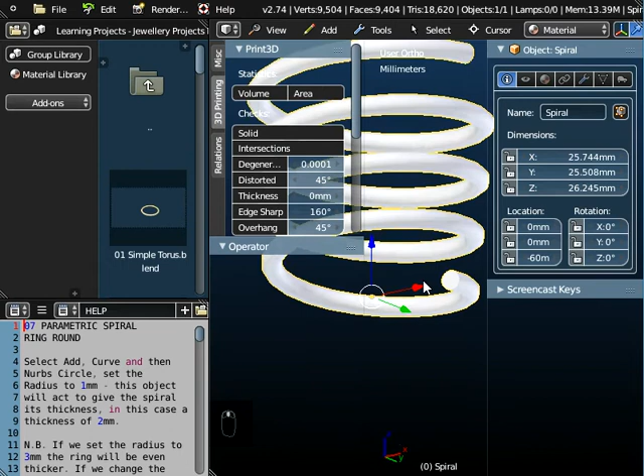If I zoom in on this spiral, what you should notice is that it's got a circular cross section, and the first thing that we need to do before we can create the spiral is to create this circular cross section. We don't have to have our spiral ring with a circular cross section. We can change it to a square cross section, or triangular if we like, but we're going to stick to a circular cross section today.

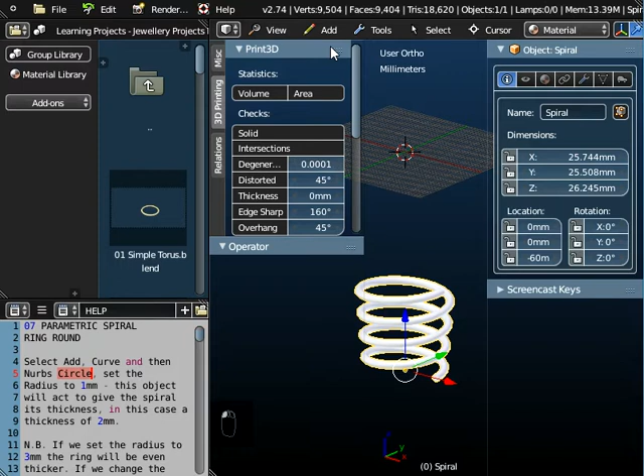So the first thing we're going to do is to add a curve and then add a NURBS circle. So we're going to go to add curve and NURBS circle.

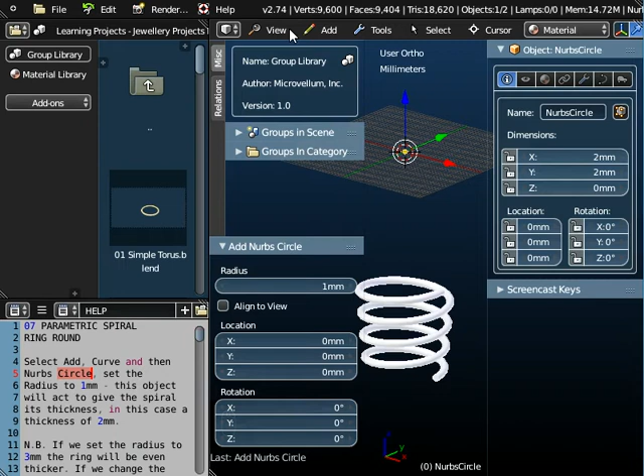Now this properties window pops up here, and it tells us that the radius of the circle is 1 millimeter, and therefore the x and y dimensions of the circle are 2 millimeters. In other words, the diameter of the circle, the distance from here to here, is 2 millimeters. And what that gives me is a thickness of my ring of also 2 millimeters, because we're going to use this NURBS circle and wrap it around this spiral.

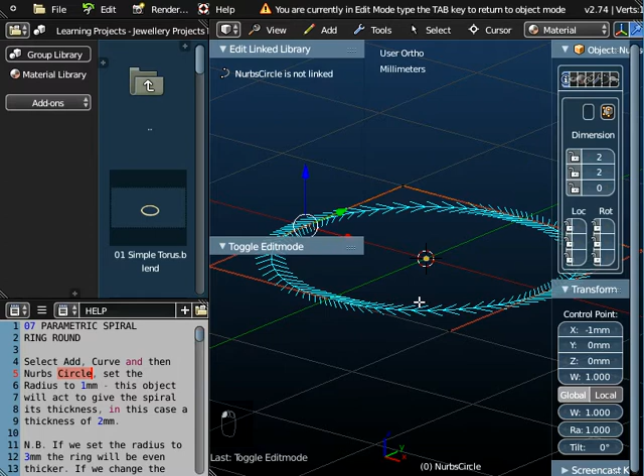If I go to view and zoom to selected again, at the moment this does look like it is just a simple circle, but if we press the tab key we'll see it's a bit more complicated than that. Because it's a NURBS circle, it has got a number of control points around it, like Bezier curves and Bezier circles. NURBS circles have got control points around them, so we could, if we want, modify this to a different shape.

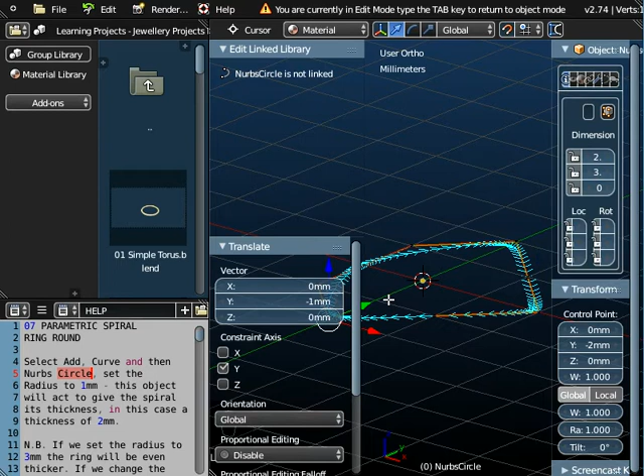Before I do that, I'm going to switch on snap and select increments so that when I do modify it, I'll modify it in particular ways that I can easily put back. So as you can see, I'm modifying what was a circle now into a completely different shape. So there we've almost got a square look. If we applied this shape around our spiral, we'd end up with a square cross section.

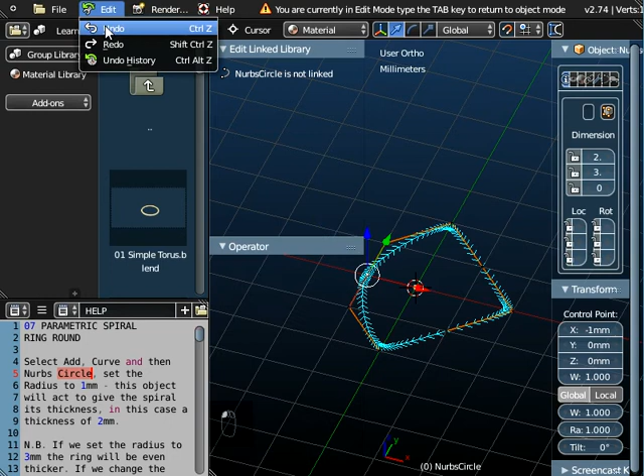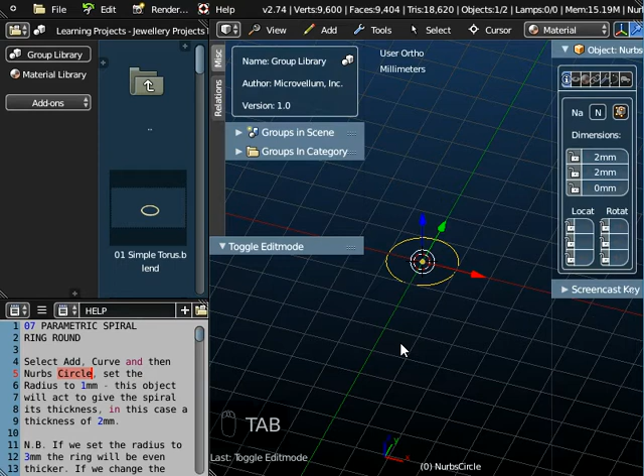I'm just going to undo all that because I want to leave it as a circle. Okay, so there's the circle back where it was, and I'm just going to switch the snap off as well. I only switched that on so that it made life easy in terms of adjusting that shape. So if we press the tab key to come out of edit mode now, it looks like a circle there, but it's a little bit more complicated than that. It is a NURBS circle which we can reshape. Okay, so that's the first object that we need.

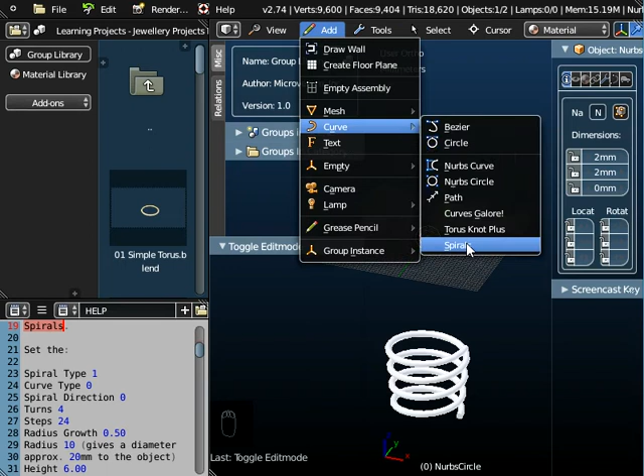Now the second thing is we need a spiral. So if we go to add curve and spirals, again it's important that this toolbox is open. If the toolbox isn't open, you can always press T on the keyboard. T will open and close the toolbox, because we've got some parameters in here that we can change. Now let's just zoom to selected again.

Now we can't really see the spiral at the moment because it's overlapping with the NURBS circle. But you can see it now. Look, if I change the spiral type to 3 or to 4, you can see that the spiral changes shape. So spiral type 1 actually does look like it's a circle, so we don't need to change spiral type, I'm going to leave that as is. And we're not going to change curve type or spiral direction either.

But we are going to change the number of turns. We're going to increase the number of turns to 4. Now you can't see anything at the moment, but we will do as we change some later values.

Now step 24. 24 probably means if we count around it, there will be 24 segments around the object. But we don't want to change that either, not in this lesson.

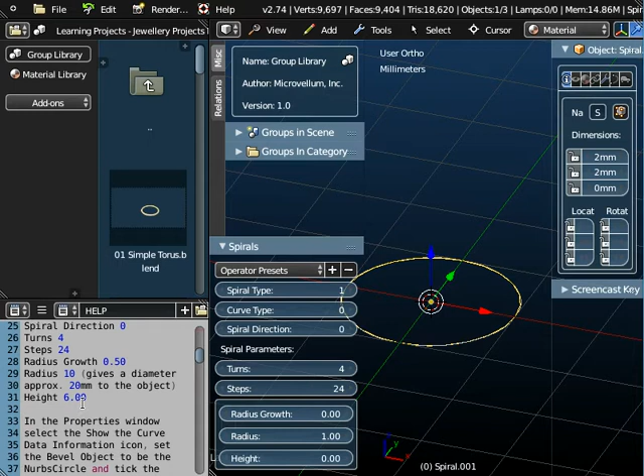The next thing we want to change, however, is the radius growth. So if we click on this one, you'll see what happens. Now we can see the 4 turns, because the radius growth does what it says.

We start off with a radius of 1. Radius growth means after we go round 1 turn, instead of a radius of 1, we're at a radius of 1.09 at this point here.

When we go round the second turn, we're at a radius of 1 plus 0.09 plus 0.09. So that's what radius growth is doing.

And we want to set this at 0.5, so I can just type that in. That's just going to, we'll see when we create the solid ring what effect that actually has. So that's the radius growth.

Now the next thing we want to change is the actual radius itself. At the moment, this radius here is 1 millimeter.

So we want to increase that, and as you can see, as we increase it, the actual spiral is moving away from the NURBS circle. In the center here, what's left is the NURBS circle.

This is now the spiral that's moving away from it, and we want to set the radius to be 10. So I'm going to actually type it in, 10, and then just zoom back.

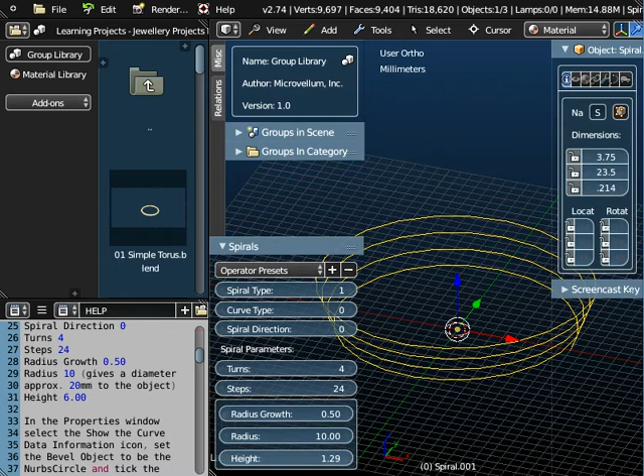And then the final thing we want to change is the height. Well, as we do that, you can see what's happening. Each successive spiral is moving upwards. So this is, the height is giving us the width, if you like, of the ring.

We want to set it at 6, so I'm just going to type in 6 now. Okay, so there's our spiral with 4 turns and a radius of 10.

And we've also got this radius growth. Now what the radius growth means is the radius at the bottom of the ring is smaller than the radius at the top. So the ring actually tapers outwards.

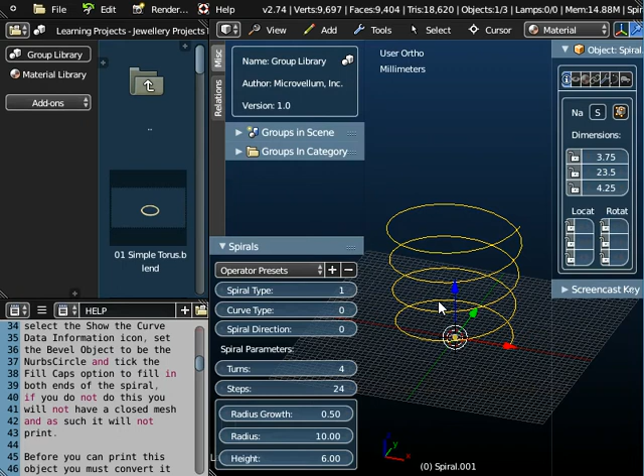It will be a smaller radius, a smaller diameter at this end than this end. So the ring will taper outwards.

And you can see that in the finished object. It's smaller at this end than this end.

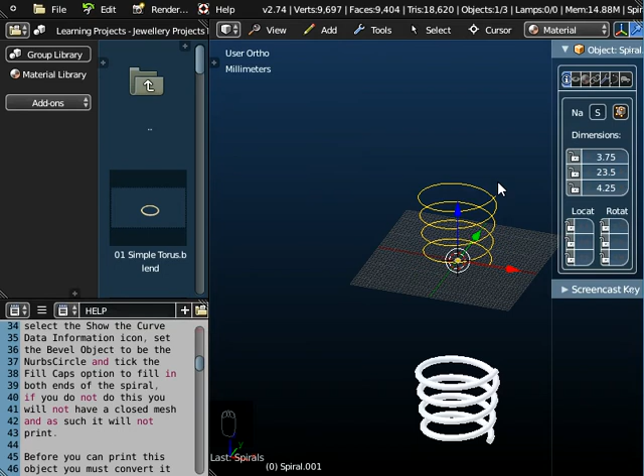So we've now set all the values in the properties panel here for the spiral. We don't want to make any more changes there. So what we need to do now is give this spiral some thickness, and we do that in the properties panel.

Our spiral is a curve, and in the properties panel there is a curve icon, and when we click on that icon, it says show the curve data information.

We can see that there are a couple of things in here, and a couple of properties that we can change. Now there are 2 things we need to change here.

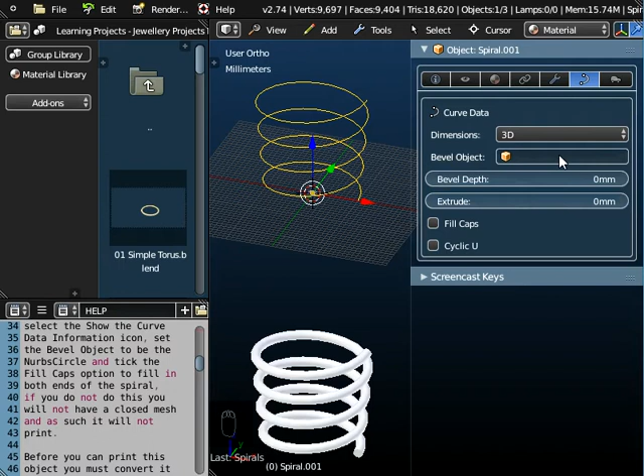First of all, we want to change the bevel object. And when we do that, when we click on there, you can see the name NURBS circle. That's the first item we put onto our workspace, the NURBS circle.

And when we select NURBS circle, what the system does is it wraps the NURBS circle all the way around the length of the spiral.

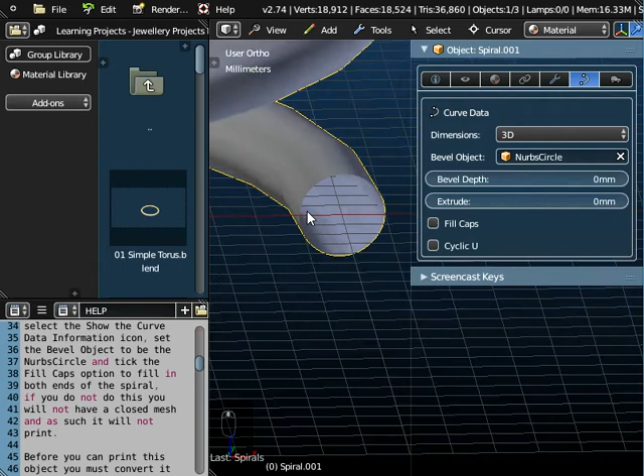So it gives the spiral a thickness, a diameter of 2 millimeters. It just wraps the NURBS circle around. Now if we zoom in, you'll see the one thing it doesn't do is it doesn't fill in the end, and the same is true at the other end of the spiral.

But all we need to do is tick this box here, fill caps, and that fills in the end of the spiral. So we do need to tick fill caps.

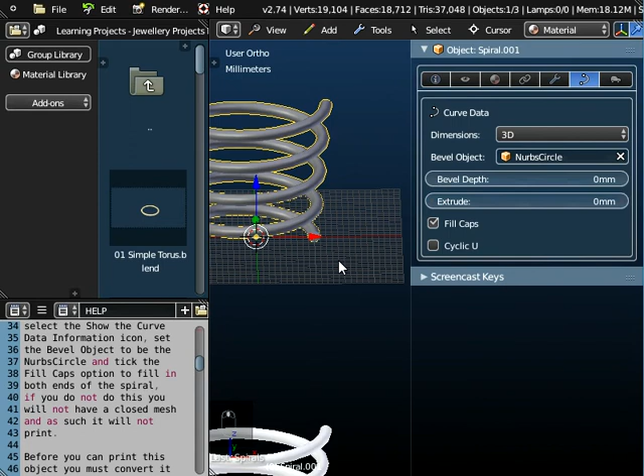Now this won't make a perfect job of it in terms of 3D printing, but when we go to NetFabb Basic, any little errors there are at the end there, NetFabb will sort it out for us. So, bevel object NURBS circle, fill caps.

To apply this in Fluid Designer, we always need to go to Tools, Object Tools, and convert it to a mesh. When we do that, it will disappear. There's no curve icon here now. This is now a mesh, it's not a curve anymore, so we can't change those properties again, so you do need to be sure about what you're doing before you apply it.

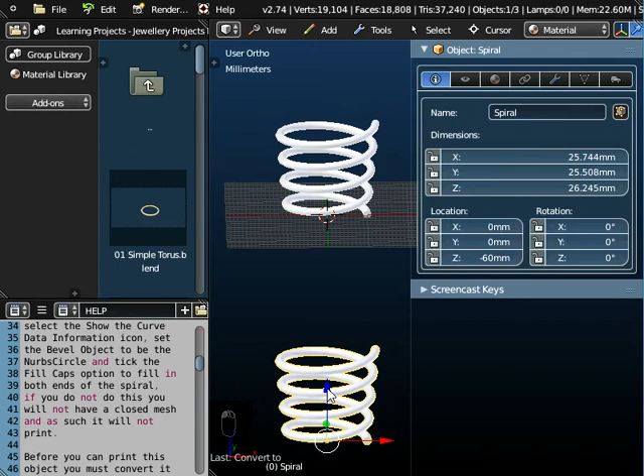So if we now delete the original object, X to delete, here's the one that we've created today. Now the only thing is, let me just go to view from top, and if I just zoom in, you can see it tapering away. That's not because we're in perspective mode, it's because of those radius growth settings, so it does taper.

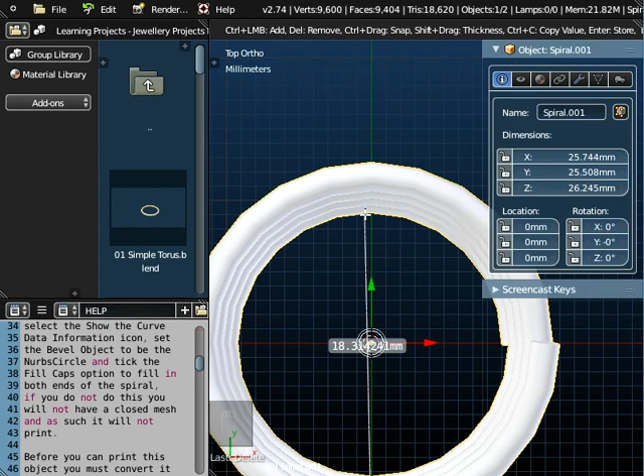And if we use the interactive ruler and we measure the internal diameter of this, it's 18 millimeters, so it's a little bit less than the 20 millimeters that we set it up to.

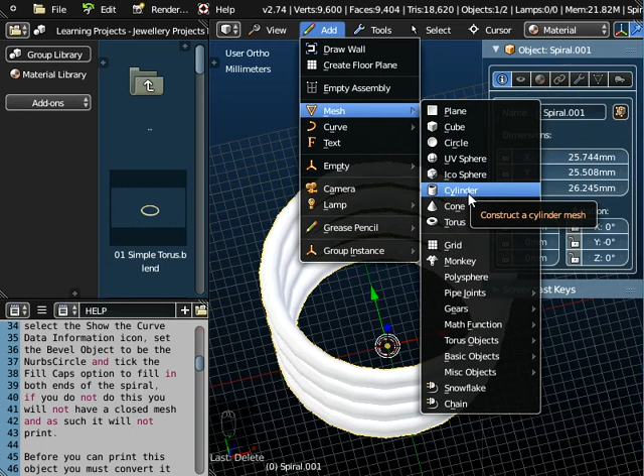If we wanted to adjust the size of this, if we wanted to resize it, we could always, as you've probably seen in earlier lessons, add a cylinder, size the cylinder to the diameter that we need for our ring, and then S to scale the ring.

I'm not going to do that in this instance. Oops, I have actually accidentally added that. I didn't intend to. I'll just delete that. And I'll also delete the NURBS circle. It won't print anyway, but let's just get rid of it. So the only thing we've got is our spiral.

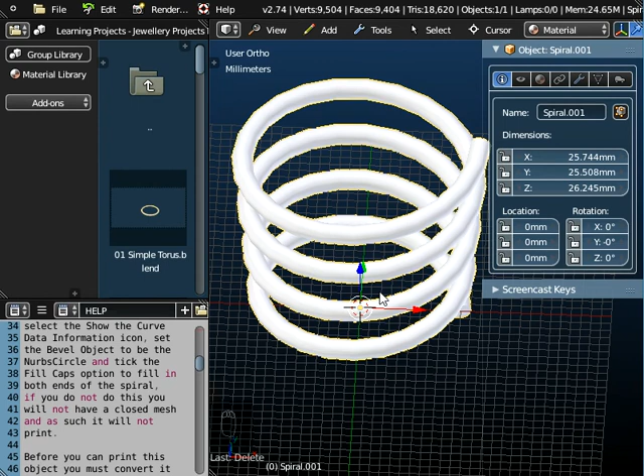So I'm not going to resize it in this particular video. I've shown you a few times before how to do that. What I'm going to say now is that what we need to do is to save it.

So we go to File and Save As. Go up through the menu system and go to My Projects, Jewelry Projects, Rings. So we save lesson 07, save it as a parametric spiral ring with a rounded cross section, and you save it as a Blender file.

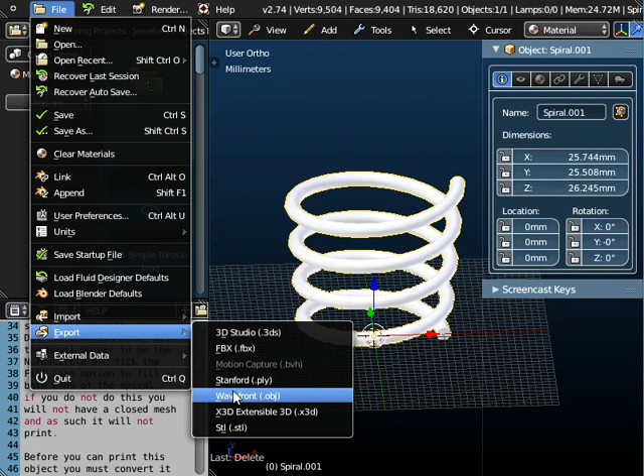Now it is very important with this one that we need to go to NetFabb Basic and fix it. So if we export it as a wavefront object and export it to the desktop with the file extension OBJ, and then if you run NetFabb Basic and go to Project and Open, go to the desktop, open 07 parametric spiral ring with a rounded cross section, you'll see you do get a warning red triangle. That's exactly what I was expecting.

Now you can probably see a little bit more clearly here that there are 1, 2, 3, 4, 5, 6 - there are 24 segments around here. So we've got a relatively chunky ring. If we wanted a much smoother ring, we'd have to increase the number of segments in the properties window back in Fluid Designer.

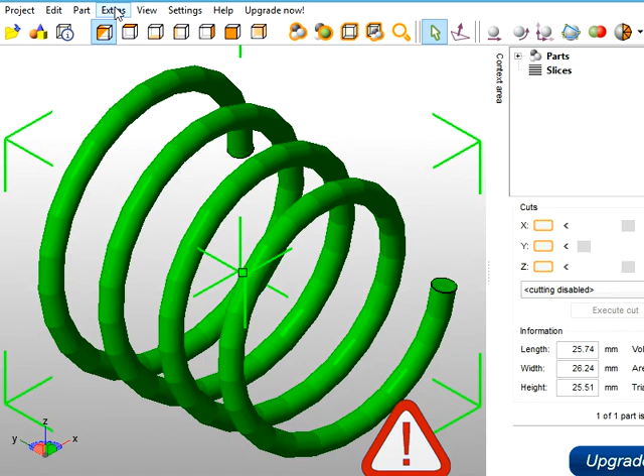But here what we need to do is go to Extras and repair the part. And you can see that it's highlighted in yellow at the end. Fluid Designer does not make a perfect job of tidying up, putting in end caps as they're called. So if we just click Update, we'll see what the problems are. Well, there's some border edge problems and there are 4 holes.

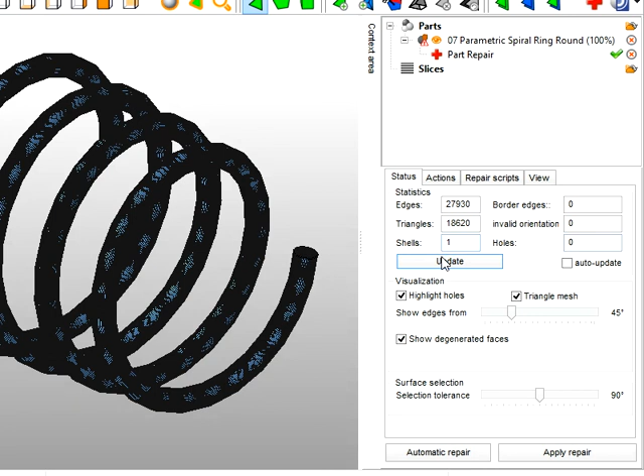But if we run automatic repair and execute it and click Update, not a problem. Netfabb's fixed it all. No border edge problems, no orientation issues, no holes, 1 shell. So we just need to apply the repair and remove the old part. And as you can see, our warning red triangle is gone. So we should be okay with this.

So if we go to Part, export the part as a wavefront object, export it to the desktop as the repaired file, and save it. And that's it. That's the printable file format.

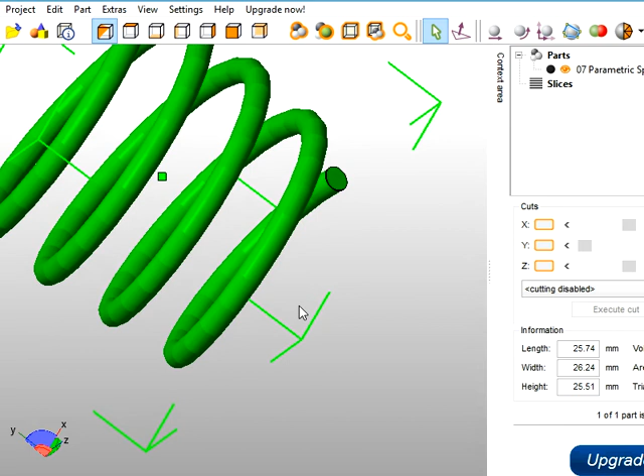Okay, so we've created for you there a parametric spiral ring with a circular cross section. But if you modify the NURBS circle, you can come up with any cross section that you like. Okay, so that's it. That's the end of this lesson. Thank you.